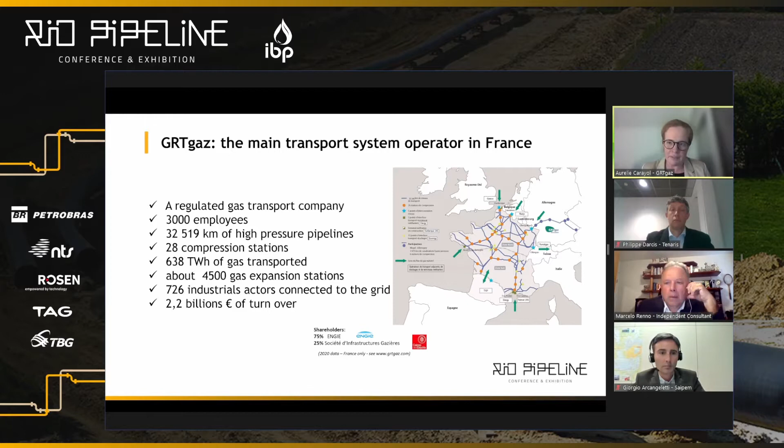My name is Aurélie Carayol, and I'm working at GRTgaz, which is one of the major gas transmission operators in Europe, with more than 30,000 kilometers of high pressure pipelines. And we transport each year more than 600 terawatt-hours of gas. And we have more than 700 industrial clients that are connected to our network. We are a regulated company, and we are preparing to accept hydrogen either as a blend of natural gas with hydrogen or pure hydrogen.

So we have two goals. The first one is to integrate the production of synthetic gas or hydrogen into the existing gas network. By synthetic gas, I mean gas produced by technologies that use waste, which contains a little percentage of hydrogen, like pyrogasification, hydrothermal gasification, methanation. In French law, there is a right to inject this type of gas, renewable and low carbon gases from hydrogen producers or synthetic gas producers.

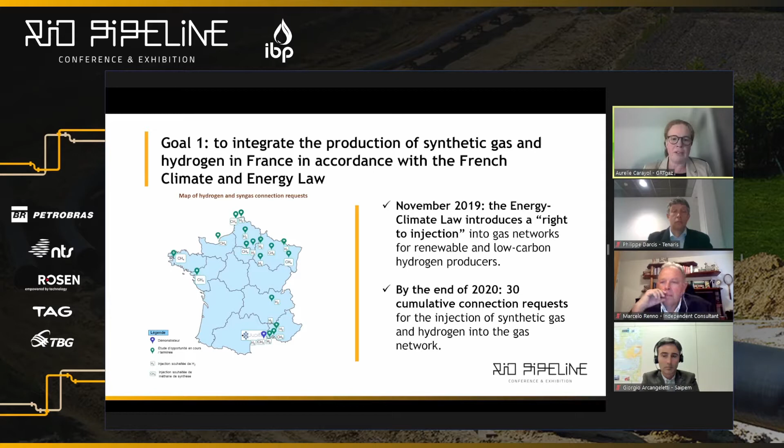And we already have had about 30 cumulative connection requests to the natural gas network, and we are studying them right now. To define all the procedures to integrate this type of gas blended in the natural gas, we have established a consultation working group led by GRTgaz, with all the French gas operators, including distribution, storage, and also associations. And we are working with the clients, because that's a huge topic, to see how sensitive the clients are to hydrogen, even for a little percentage of hydrogen. We are defining all the procedures and contracts to access the network, and a registry to have a kind of queue for these projects.

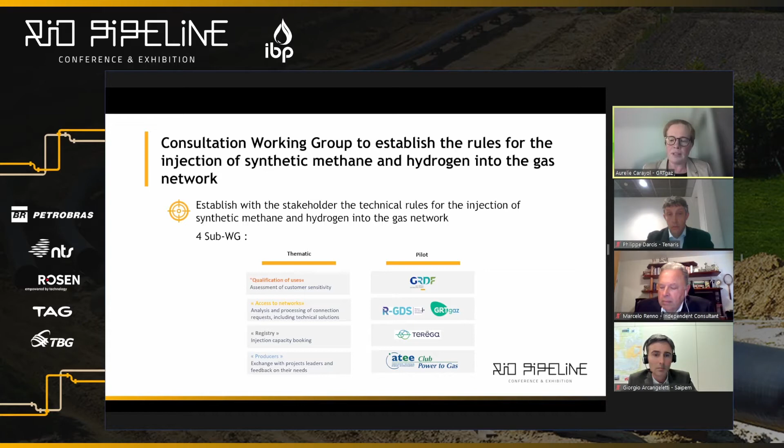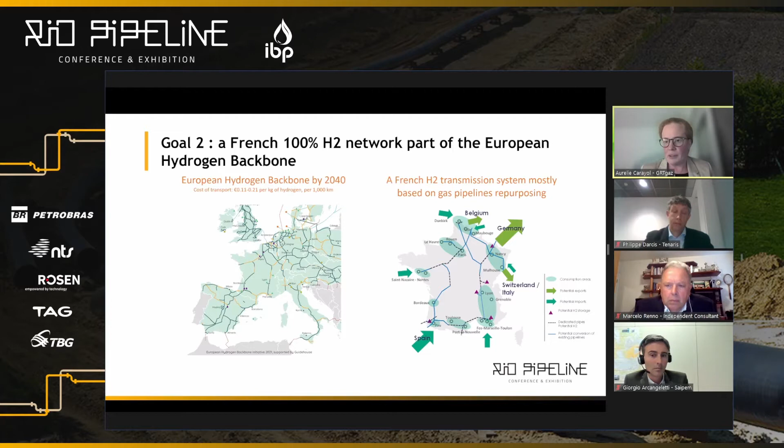Yesterday, we just released a study conducted by Guidehouse with other storage and transmission operators that showed that it's very competitive to use gas infrastructure to transport hydrogen, and that the cost will be lower than if we are not using them by 2040. How do we prepare for that?

So we are very involved in a cross-border project with Germany and Luxembourg, which is called MosaHYc, for Moselle, which is in Lorraine, eastern part of France, Saarland in Germany, hydrogen conversion. So this project is with a German distributor called Creos and a utility from Luxembourg called Encevo. And the objective is really to develop a hydrogen valley in this eastern part that we call the Grande Région.

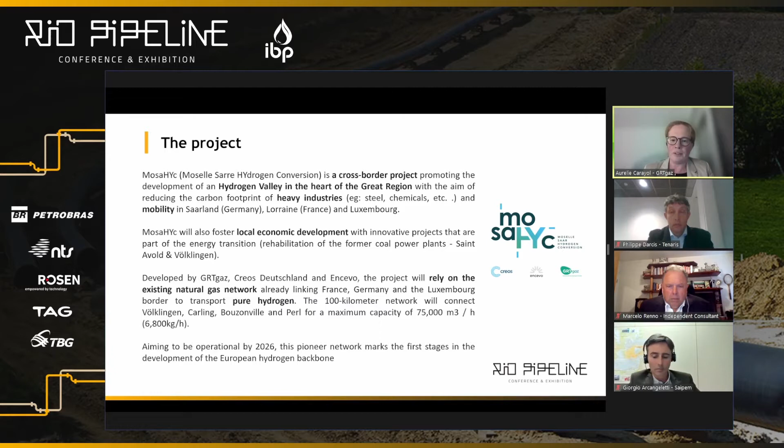It's a cross-border region. And to bring hydrogen to big industrial, for example steel industry, but also mobility in Saarland, because there is a lot of mobility in this area, people going from Germany to France up to Luxembourg. And we are going for the first time to repurpose a 100-kilometer pipeline for pure hydrogen coming from Germany up to France, up to Luxembourg. And this project will be operational in 2026.

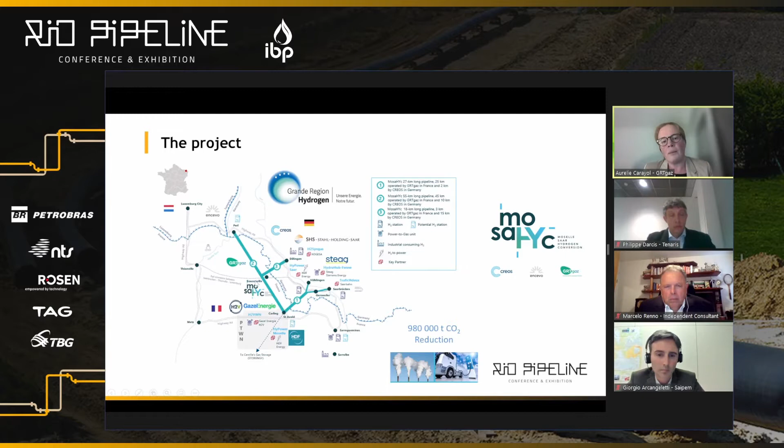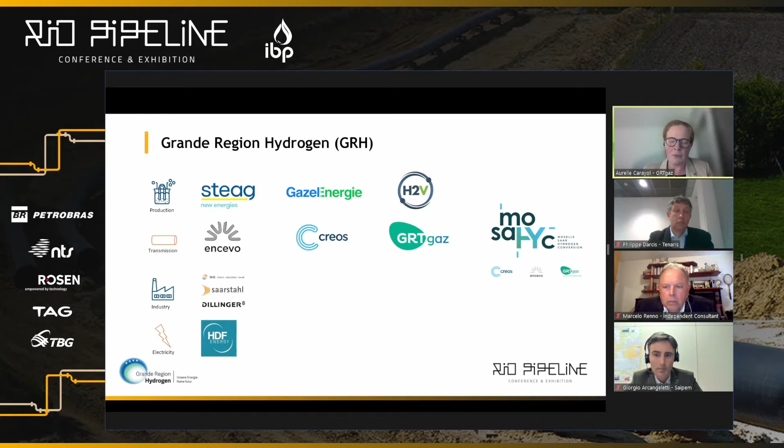And this project belongs to what we call Grande Région Hydrogène. It's a huge initiative with all the producers that I mentioned, the transmission company, and the industry that are using, Dillinger and Saarstahl, but also gas to power industry from Hydrogène de France, which is constructing fuel cells, huge packs of fuel cells, that will use this large quantity of hydrogen that will be brought by pipes. And here you see all the quantities step by step.

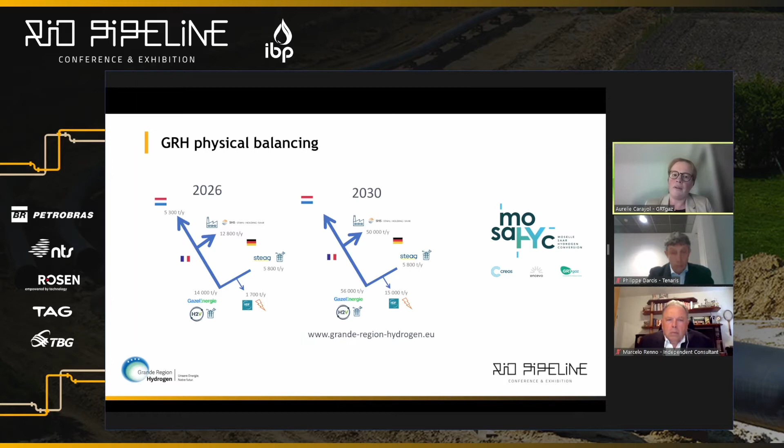By 2026, you have a production from 14,000 tons per year in France up to 5,800 tons per year in Germany, coming to the industrial clients. And in 2030, these industrial clients will consume 50,000 tons per year, because its process to produce iron will use more hydrogen step by step for direct iron reduction, like I mentioned.

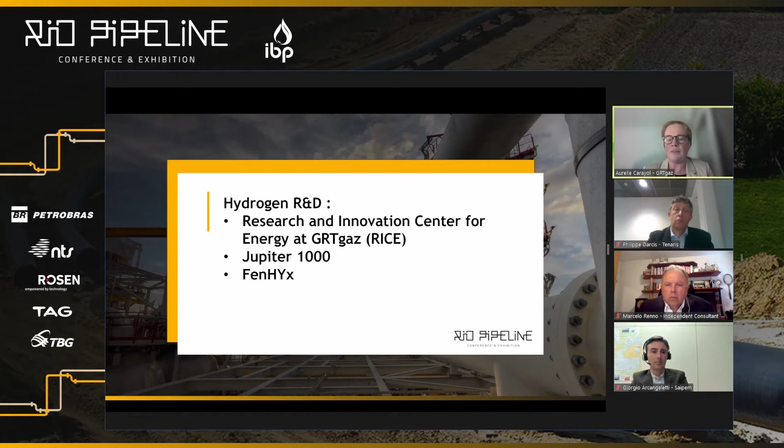We also are working to prepare our network through a lot of research and innovation projects. We have, which is very rare in Europe, our own research center, which is called RICE, with more than 100 PhDs. And we have demonstrators, Jupiter 1000, and brand new hydrogen test benches called FenHYx, which will be inaugurated November 23rd, so the week after next.

So how do we prepare? We have a dedicated research program to first ensure the security and integrity of our assets. So we are going to check our network equipment.

We will check our pipelines to be repurposed or to accept hydrogen as blending. We check all the integrity, mechanical integrity. We have a traction machine. We are also involved in safety procedures. We develop a training

with our research department because hydrogen is very specific, to know how to manage with the flame that we cannot see by eyes. And we also work on maintaining the quality of transmission. We are working on metering, certification metering for pure hydrogen, management of the network through compression, because it's kind of different than natural gas. It needs more energy for the compression. And we have specific test benches.

So we have the power to gas demonstrator in south of France in Fos that I will present later, where we can do real condition tests of blends of hydrogen into the gas network. So we are injecting in our network since February 2020 a limited amount of hydrogen, with 3 clients connected at the end of this network.

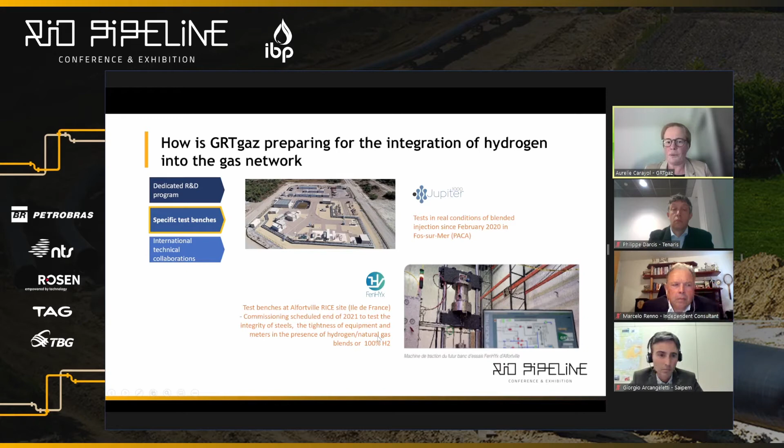And we have these brand new test benches in our research center site next to Paris in Alfortville called FenHYx, for Future Energy Hydrogen Mix. And we are going to test the tightness of equipment and also all the integrity of the steels with that traction machine that you can see in the picture.

And to mention Jupiter 1000. So Jupiter 1000 is a demonstrator with all the French players, including renewable electricity producers, Compagnie Nationale du Rhône, the electricity transmission operator RTE. We are testing 2 types of electrolysis from McPhy, one alkaline, another one PEM, with the membrane. We are injecting hydrogen into the gas network. We are working also with Teréga, which is the other transmission operator in southwest of France, but that's in the GRTgaz network. And the other part of Jupiter 1000 is methanation.

So we are combining CO2 that is captured by Leroux et Lotz from industrial fumes. And we are combining it with H2 through reactors developed by the company called Khimod with CEA, which is a huge research center in France. And we are producing synthetic methane to inject into the gas network.

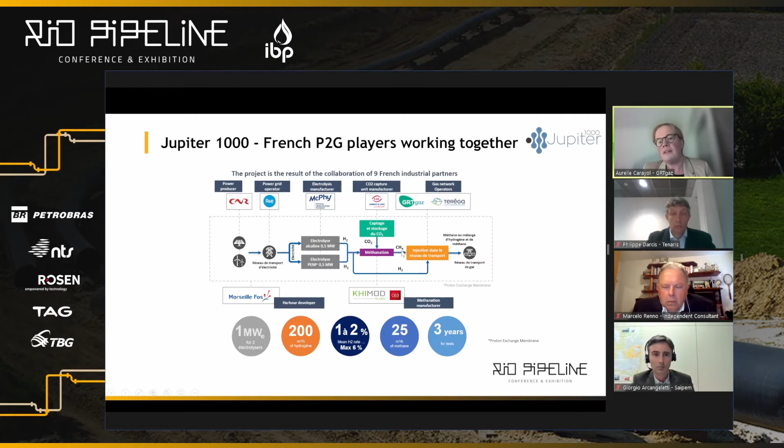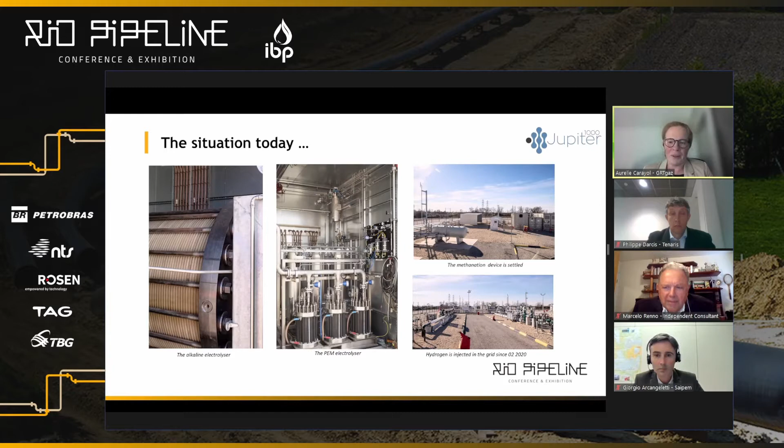And here you can see some pictures. So you have on the left the alkaline electrolyzer, the PEM electrolyzer in the middle, and the methanation device that is settled but not operational yet. In injection here you have where the blending is done. It's a little bit small, but you're invited to visit Jupiter 1000. It's open. Also, we received a lot of people to visit Jupiter 1000. And yeah, early 2022, the CO2 pipeline would be ready and we will do the methane injection.

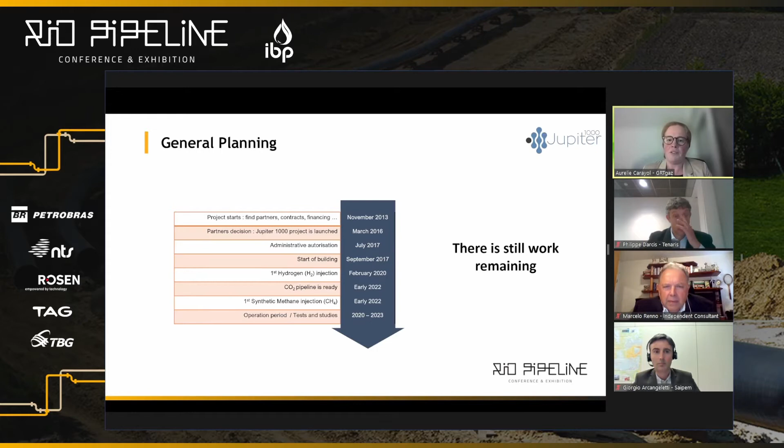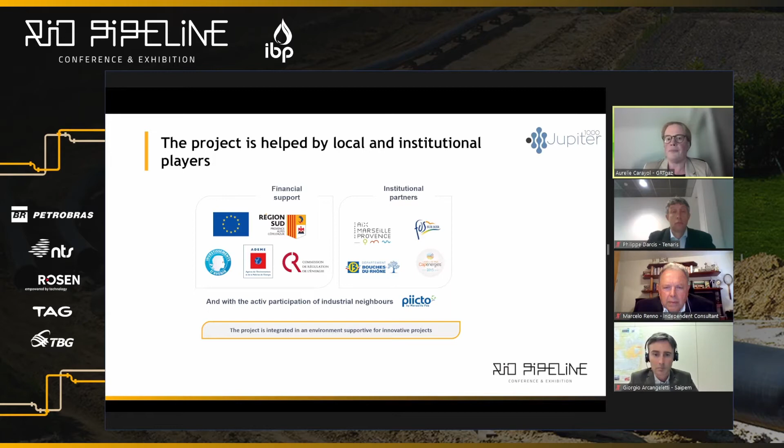This project is helped by the European Commission, the South region, our regulators, and also all the people from the area, the city of Aix-Marseille-Provence, as you can see.

Then I will focus on our R&D platform called FenHYx. As I said, we have 2 sites at RICE, our research center. This is a collaborative testing facility. That means that we have contracts with other European TSOs that will test their pipes and specific steel. We already have running contracts, and it's also open to other companies to test equipment. It's really a European but also international platform, and we would like to be as open as possible. So please feel free to come back to us if you're interested.

We are focusing also on gas quality because we changed in GRTgaz our chromatographs to be able to detect hydrogen as a blend into the gas network. Our research center has a strong experience in industrial safety, and also network materials to test permeation and things like that. And our new benches are really focused on tightness tests and pipe integrity, aging of steel tubes, corrosion tests, and treatments. And we are also able to qualify meters through aging issues and their performance.

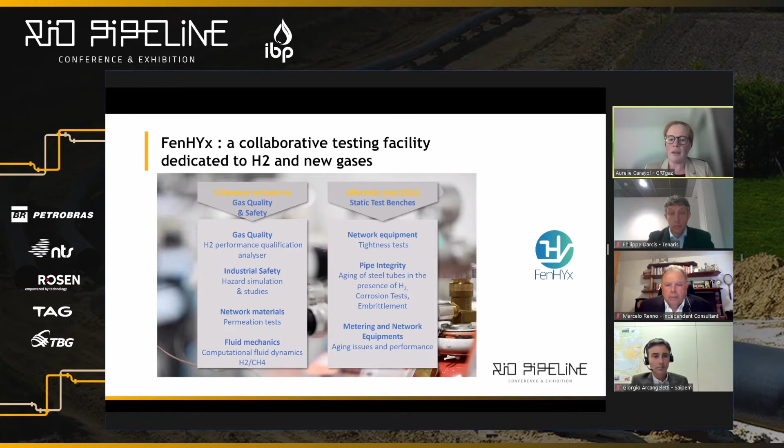So here you can see little pictures of our traction machine and the first tests that have been run. This project is also supported by Région Île-de-France. It is funded also by the Region and our regulator. And as you can see, that's all what we are going to investigate, the capability for our pipes to be repurposed and our equipment to accept hydrogen, and test also new equipment.

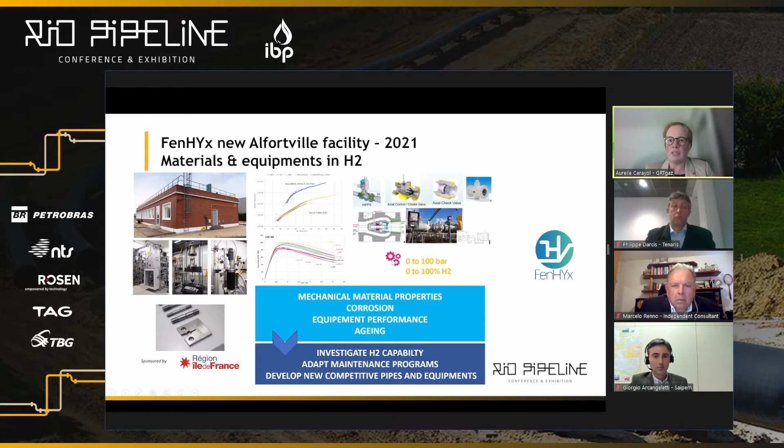These are the international technical collaborations that we have. We are part of Hydrogen Europe. We are answering calls from the ex-FCH JU, which is now Clean Hydrogen for Europe.

Our person responsible for hydrogen research is leading the strategy topic for hydrogen in GERG, which is a European research group. We are present also at Marcogaz, which is a pre-standardization group. I'm co-chairing the Hydrogen Task Force. We are part of different initiatives with other TSOs, including H2GA, led by SNAM. And we also are very involved in PRCI, especially in the renewable roadmap through our research center with our specialists and experts.

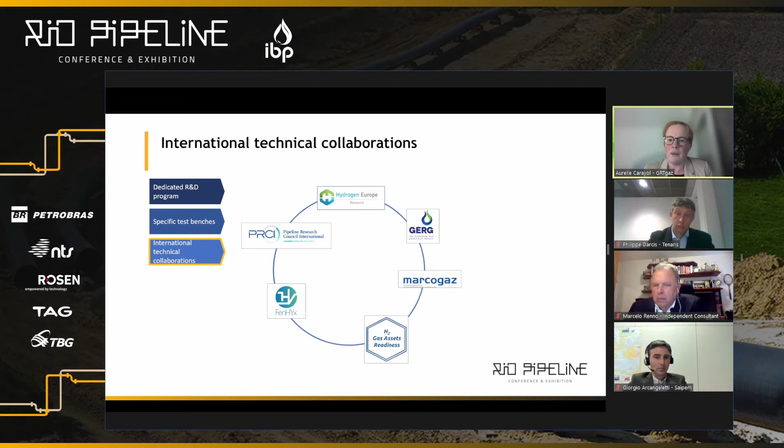Regarding RICE partnerships, here you can see that we have more than 100 PhDs, research engineers and lab technicians. We have 3 R&D centers. They have 400 patents and inventions, and they are leading expertise in process and gas characterization, pipe and grid equipment, performance and industrial safety, system modelization, and technical economical studies.

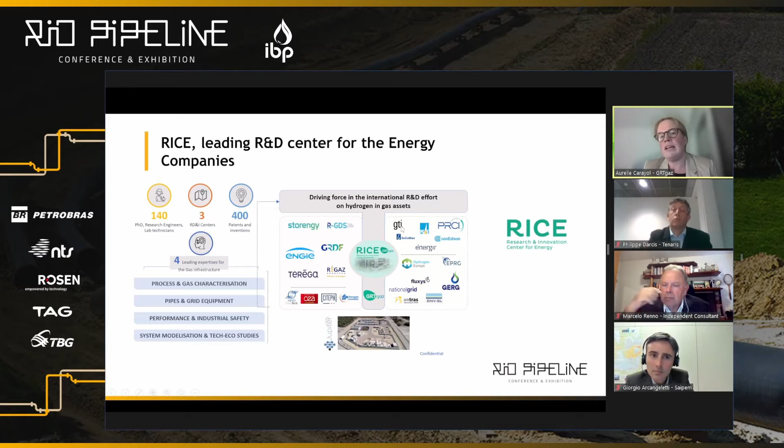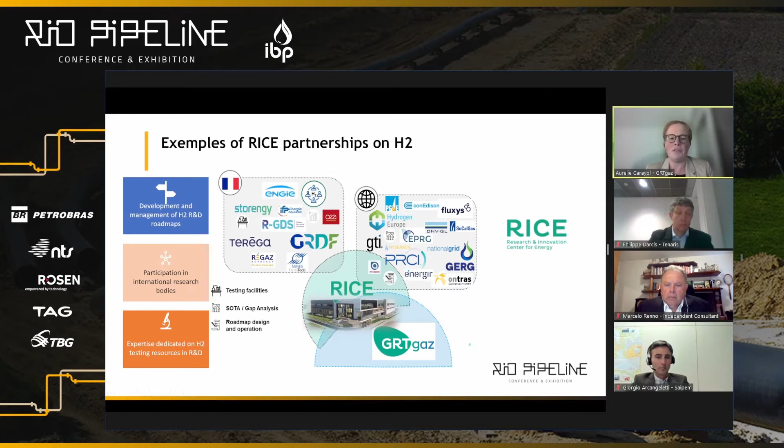And here you see all their clients and the collaboration that they have with European companies, but also American companies like Énergir in Quebec, Con Edison, SoCalGas in the US, but also institutes like GTI and of course PRCI. And this is the example of all the partnerships that they can do. They can develop R&D roadmaps. They already have answered calls to do that. They participate in international research bodies, and, like I mentioned, they have expertise and test benches dedicated to hydrogen.

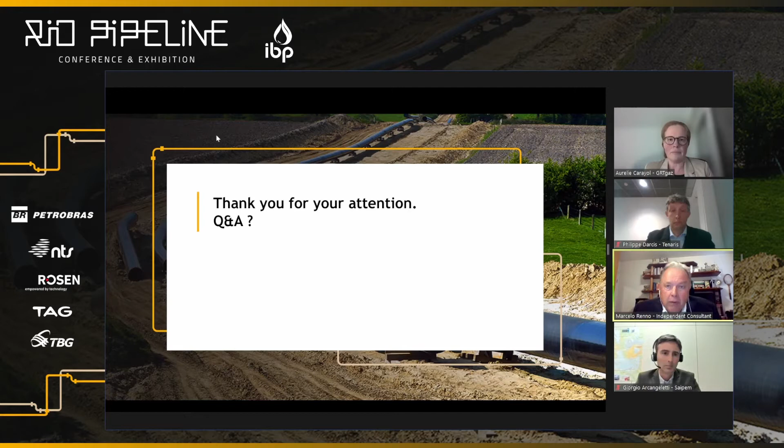Thank you very much, Aurélie. Very interesting to know about all the activities concerning this aspect, all the work being done in France, in Europe, concerning this hydrogen infrastructure implementation and also utilization of existing natural gas infrastructure. Thank you very much. And so we are going to have the Q&A at the end of the session.

So the second one that we are going to ask to present their thoughts is Mr. Philippe Darcis. Some words about Philippe. He received his PhD in mechanical engineering science from the University Blaise Pascal in Clermont-Ferrand, France. Philippe joined Tenaris as R&D department manager in Tamsa in Mexico. In 2012, he became the pipeline technology senior director in Tenaris, now in Italy. And since 2021, Philippe is the chairman of the H2Pipe DNV JIP, focused on transportation of hydrogen. Philippe contributed to more than 100 international technical papers.

So we are going to have the opportunity to listen to Philippe talk a little bit about specifications and also submarine transportation, offshore pipelines. Okay, Philippe, the floor is yours. Okay, thank you, Mr. Chairman, and thank you for the opportunity to share this presentation and experience on hydrogen transportation. I will go through this presentation that will give you an overview of what we are doing and also the global trends that we are seeing.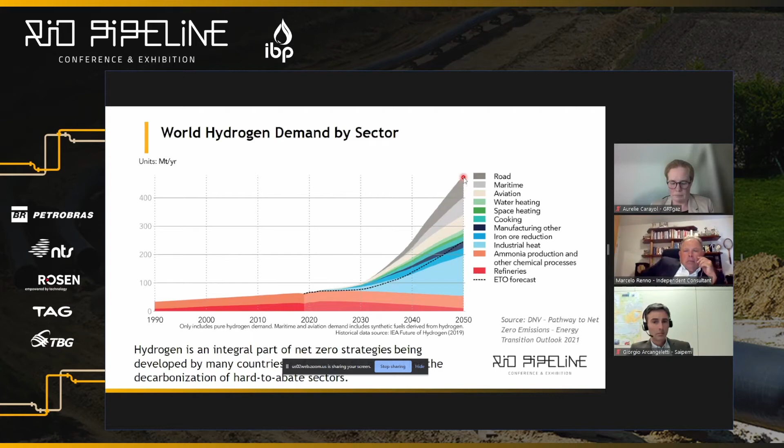And we expect for 2050 that hydrogen will take an important part of the energy for these sectors, around 15–20%. What we can see also from this graph is that hydrogen demand will almost double every decade. Now, let's have a look at how it will look. For this, I like to use this illustration from DNV, in which you can see in blue an actual network of natural gas, and in green how the hydrogen pipeline network will look.

So if you look, the blue one is well known and quite classical. You see that we start from the extraction of natural gas. Here, for instance, you have extraction from an offshore field. It will go through the processes, and the natural gas will be used in different applications like power generation, industrial, residential, and commercial.

Concerning the hydrogen, the first step will be to produce it. There are different ways to produce hydrogen, but the trend is to use what we call the blue hydrogen or the green hydrogen. Concerning the blue hydrogen, we will use natural gas, and through a reforming technology, we will generate hydrogen and also CO2 that we will sequestrate.

On the other hand, we can also generate green hydrogen through electrolysis from electricity generated by renewables, which could come from offshore wind farms, onshore wind energy or solar energy. For this new hydrogen generation, we will need a dedicated new high pressure hydrogen transportation system, and also a repurposing of the local grid and existing transportation, in which probably it will be blended at the beginning.

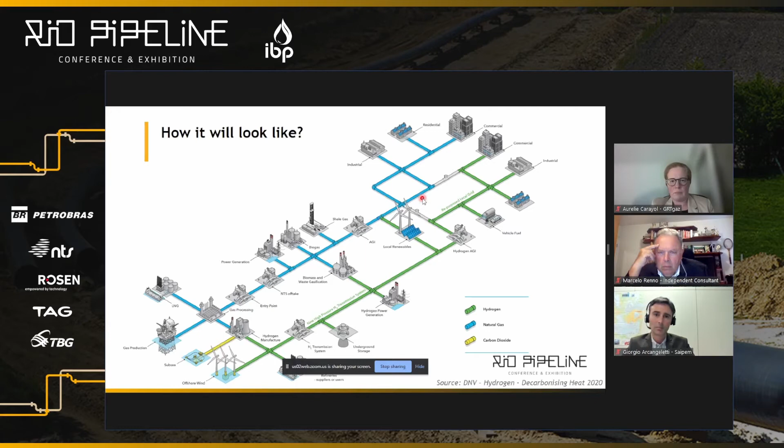Now, let's look at two different examples, one from the onshore and one from the offshore. Concerning the onshore, as already mentioned in the previous presentation, the most ambitious example that we have is the so-called European Hydrogen Backbone project, in which you can see here that different countries in Western Europe aim to transport hydrogen in existing and in new pipelines. Here you have some numbers to see how big this project will be.

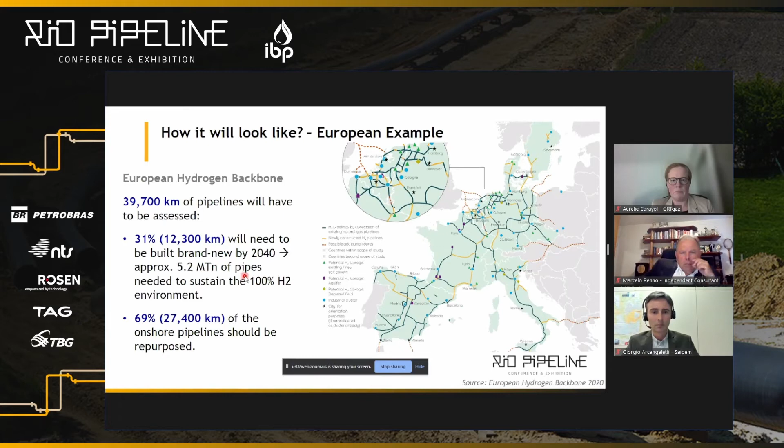So here we are talking of around 40,000 kilometers of pipeline, of which 31% will be brand new, which represents 5.2 million tons of pipe, and 69% will be repurposed. If we look now to another example, this time looking at offshore hydrogen pipeline transportation, a good example is the use of wind farms. Here you have two illustrations that represent, in the end, the same process.

We will generate electricity offshore through a wind farm. This electricity will be converted through electrolysis into hydrogen, and this hydrogen will then be stored offshore in a container directly on the seabed, and after that exported through a pipeline to the shore.

The main challenge of such a project is probably the intermittence of the electrical energy that is produced, due to the intermittence of the wind strength, and also the intermittence of the demand for hydrogen. In such a system, we will have important fluctuations in hydrogen storage and transportation that will challenge different limit states or structural integrity scenarios of the pipeline. We can name, for instance, fatigue, which will be important due to the pressurizing and depressurizing of the line.

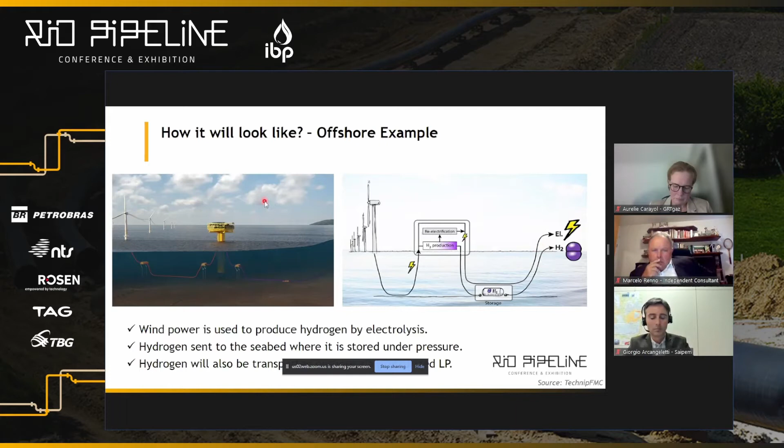Now, let's review the key elements in the development of hydrogen pipelines. Here, I listed 5 main key elements that need to be addressed. The first one is the transport capacity. The question is how much energy is moved. As you know, compared to natural gas, hydrogen has a much lower density, but at the same time a higher heating value. For a similar energy to be transported through a pipeline, we will need 3 times more volume of hydrogen than natural gas. How we will deal with this change of energy value and density in the future is a question that the industry needs to face.

The second question that we may have concerns the safety of the hydrogen itself, which is different from natural gas. Hydrogen has, for instance, a wider flammability range and also a lower ignition energy. This more explosive nature of hydrogen needs to be faced from a safety perspective. The third key element that needs to be addressed is the structural challenges related to material degradation due to the presence of hydrogen. So what needs to be modified?

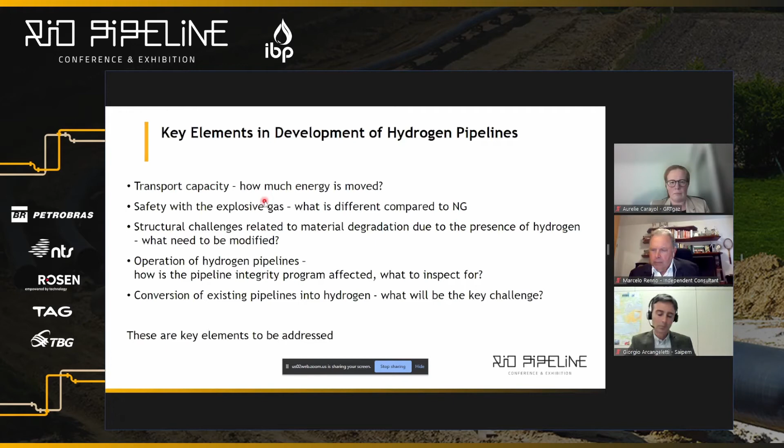Now, if we look at the different surveys performed in the industry through different professionals, we can see a good example from a survey made in January 2021, in which we asked around 600 professionals the following question: what is, in your opinion, the most significant barrier in adding hydrogen to the gas grid?

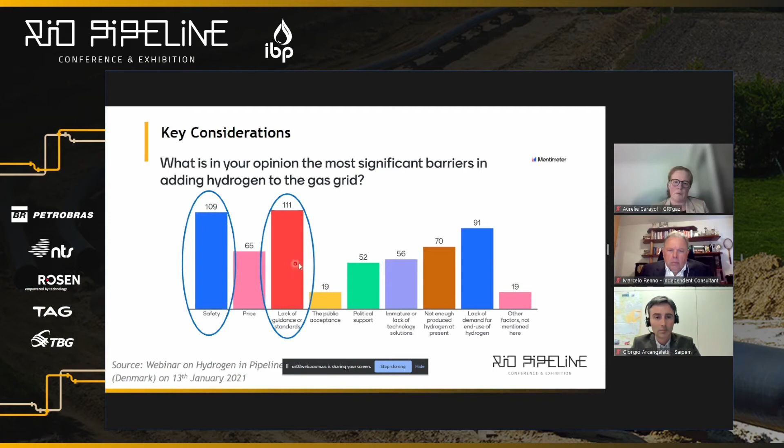So if you look at the actual way of designing hydrogen pipelines, we can easily observe that the main code of reference is ASME B31.12, entitled Hydrogen Piping and Pipeline. We can highlight three main facts concerning this code. First, it's very conservative, mainly if we use method A as the design reference, which leads to a restrictive grade in terms of pipeline and also to limited safety, very severe safety factors. The other remark is that this code is mainly based on the limit state based on burst, linking to hoop stress.

The second point is that this standard does not consider all the design limit states that onshore and offshore pipelines may face. An example is third-party damage. We can also mention soil movement or typical fatigue loads. On the other hand, this code does not provide guidelines for offshore pipelines. So based on this observation, we can see that a new hydrogen pipeline guideline is needed.

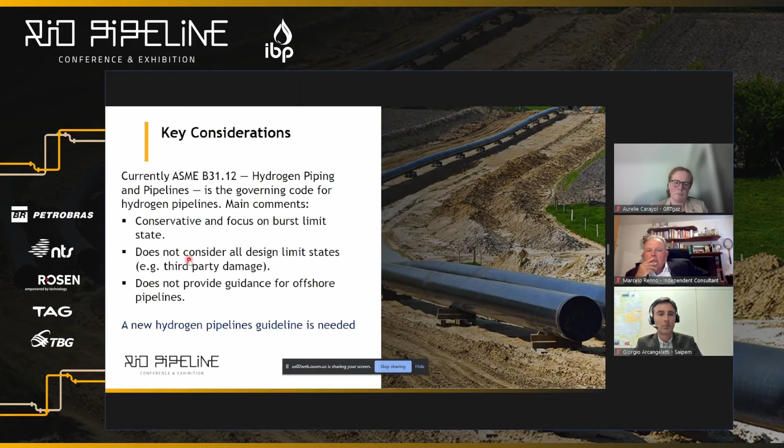Now, let's reflect on how we can build this kind of guideline or standard. I would say the basic statement is to try to identify the potential scenarios and failure modes of the pipe, and to assess them through an evaluation of, on one hand, the demand, and on the other hand, the resistance or strength.

So for this, we can evaluate different aspects. On one hand, what type of loading the pipe will have. Here we see the typical three categories: pressure, environmental, and functional/operational. From this type of loading, we can evaluate the type of failure. For instance, for pressure, we can identify burst, collapse, and running crack. We can identify how to assess it, so for instance here it's strength and fracture.

And after that, we arrive at material characterization, which is how to evaluate the pipe material.

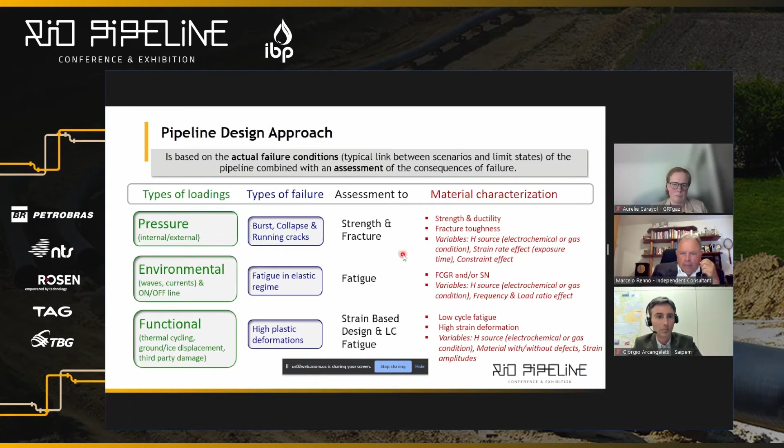So here, concerning environmental loading, in terms of type of failure, we're speaking of fatigue in the elastic regime, and for functional operational, high plastic deformation. And here we have all the material characterization that needs to be done in order to evaluate the strength of the material. The big question is how to evaluate it, and whether the experience we have in other environments is valid in a hydrogen environment as well.

Here is an example of a guideline currently in the industry; there are different ones. The one I take as an example is the DNV JIP H2 Pipe, which aims to provide guidelines based on DNV-ST-F101. So the guideline will be a supplementary recommendation based on this standard, aiming to provide guidelines for safe and reliable design, requalification, construction, and operation of pipelines intended for transport of hydrogen. Today there are 28 participants, and here there is a scope of work.

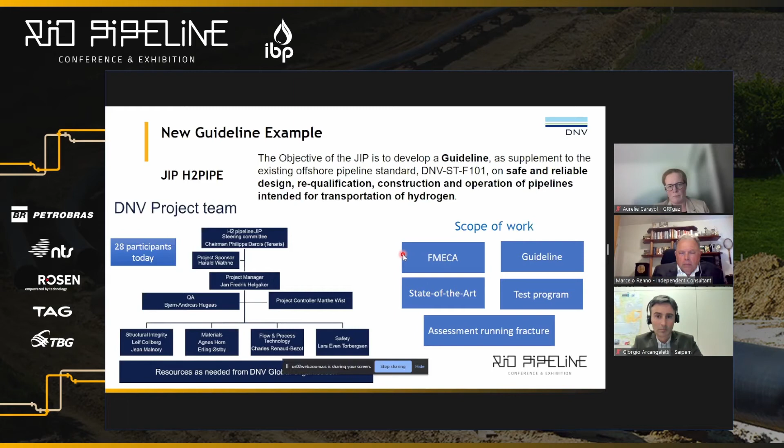I will just end with this conclusion. I think that hydrogen transportation through pipeline is a key element in the energy transition. Hydrogen will affect important things that need to be addressed, like how the pipeline is operated, the safety picture, risk assessment, and the design of new and requalification of existing pipelines. For this, a new hydrogen pipeline guideline is needed. And I will end here. Thank you.

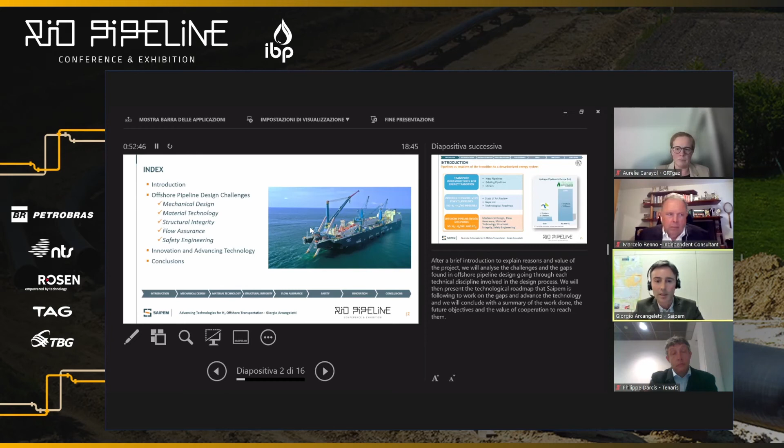In this presentation I will explain and list to the audience all the design challenges and opportunities we see for our future pipeline systems. We will start from a brief introduction, then go discipline by discipline to see the gaps we identified during the activity and the way we achieved the first results. As you have seen from the introductory slide, there are many co-authors on this work. All the disciplines normally involved in pipeline design here in Saipem have also been involved in this task - mechanical design, material technology, structural integrity, flow assurance, and safety engineering are part of the team working on this subject. We will go through a brief explanation of how we redefined our technological and innovation roadmap to target innovation and advancement in technology, and then we'll move to the conclusions.

As already partially explained by the speakers today, there is a lot of predicted and envisaged increase in demand for hydrogen pipeline. For example, the International Energy Agency sees that pipelines for hydrogen transportation, both reconverted and brand new, will increase about 8 times compared to the numbers we had in 2016, and this is a great target to take. So we launched this activity to cover both new pipeline and existing pipeline engineering.

We started from a phased approach. We completed the first part of the job, the state of the art. Then we identified and listed the technological gaps, and we redefined the technological roadmap and implemented it - we are in that phase now. All the disciplines are involved, as we said, so there's no need to repeat all of them, but basically the fluids we are targeting are obviously hydrogen, pure hydrogen, or a blend of hydrogen with natural gas.

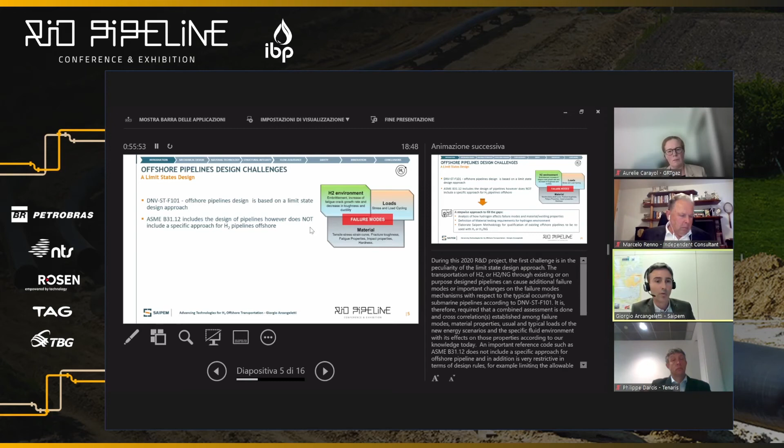Covered by Philippe. We are part of the same team in the JIP he mentioned, so we are very aligned on that.

A good way to approach this problem is through a design based on limit states, and this is aligned with what DNV ST F101 already does. So we started from that, because failure modes, generally speaking, may be affected by the presence of hydrogen, and these should be taken into consideration. We need to find the correlation between the limit states, the failure mode, the peak loads that the pipeline sees

during the installation and operating life, and so on, and the material subject to hydrogen effects. On the other hand, we have another standard available, ASME B31.12, that appears to be a bit constraining when it comes to hydrogen, for example. We will see a practical example in the next slide. So we cannot rely only on this standard, which is more applicable for onshore transportation than offshore.

Given this, we adopted a stepwise approach to fill that gap. So we started from the analysis of how hydrogen affects failure modes and material welding properties. We defined a testing matrix, a material testing requirement for hydrogen environments.

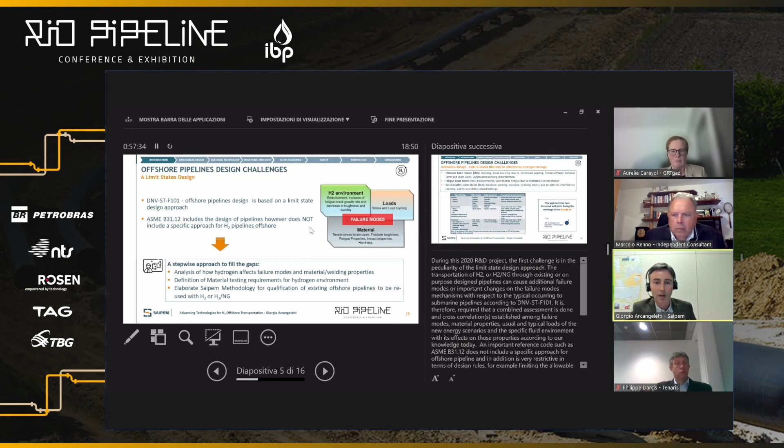This was already discussed by Philippe. Basically, we grouped the failure modes by limit states, and you see that we considered all the failure modes, starting from bursting, going to fatigue. We tried to associate a type of loading to each failure mode and to assess the design activities needed to correlate this failure mode with the materials and the hydrogen environments.

At the end of the story, the exercise gave us as a return the proposed tests in H2 environment. So we have a list of tests that we will perform. We are already starting to perform them on pipes, and this will give us very valuable information about how hydrogen affects the material at different conditions, percentages, and partial pressures. This is the same approach that was discussed with DNV within the H2 Pipe JIP.

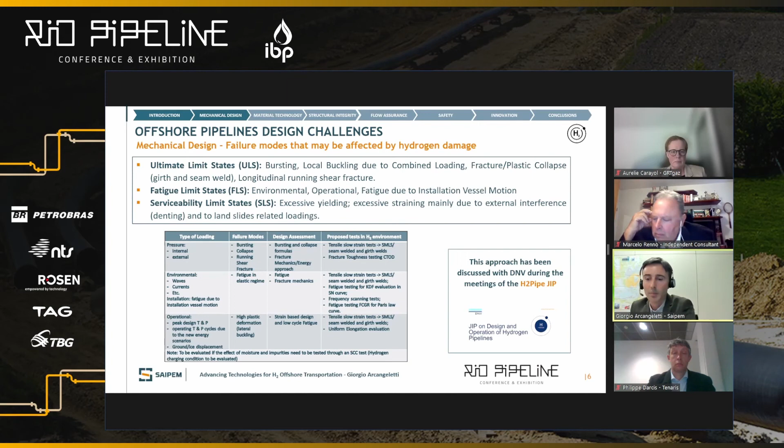As mentioned before, let's take a very practical example. We have an existing pipeline with natural gas. We want to repurpose this pipeline for hydrogen, and we apply ASME B31.12, section A.

When it comes to offshore, for sure, it's not easy to deal with something like this. It will have an impact on wall thicknesses, and so on the weight of the pipe, and on the installation feasibility and the associated cost of the system. So definitely, we cannot only rely on this very poor exercise.

When it comes to requalification, we should also take into consideration integrity assessment of the actual status of the pipe, and then we need to make a prognostic assessment of the future integrity. At the same time, if the pipeline has to be reused with hydrogen or a blend of hydrogen and natural gas, we need also to evaluate the fragile fracture and fatigue limit states.

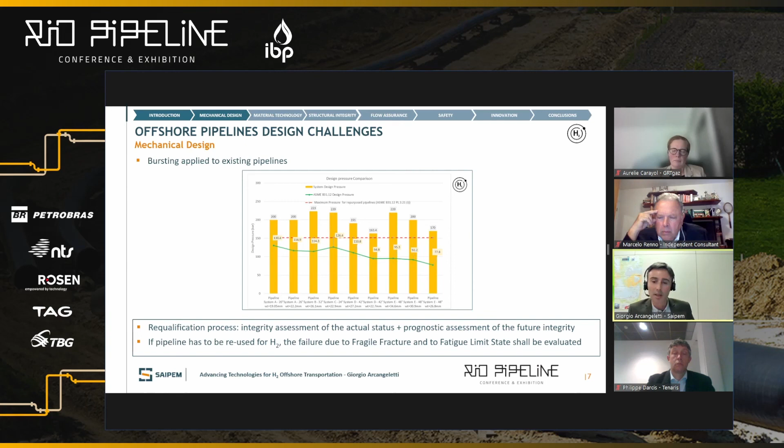In terms of materials, we have different areas that are impacted by hydrogen. Hydrogen basically impacts all the key material properties, starting from ductility, toughness, fatigue performance, in particular on the circumferential welds, which are the welds that we normally perform on the firing line of our vessels. So it's not easy; H2 diffuses through virgin surfaces.

We may need to improve the internal surface condition and reduce as much as possible the stress concentration factors. But this should be considered, not a limit to the feasibility of a system. We need to find a break-even, or at least a compromise, between this and what a normal standard manufacturing process can give you. Then, evaluation of root open defects and use of welding technology is a key factor also

for the evaluation of repurposing an existing pipeline, because when it comes to repurposing, you need to identify also the allowable defects that are compatible with hydrogen, and move forward like this to avoid any issue in the future.

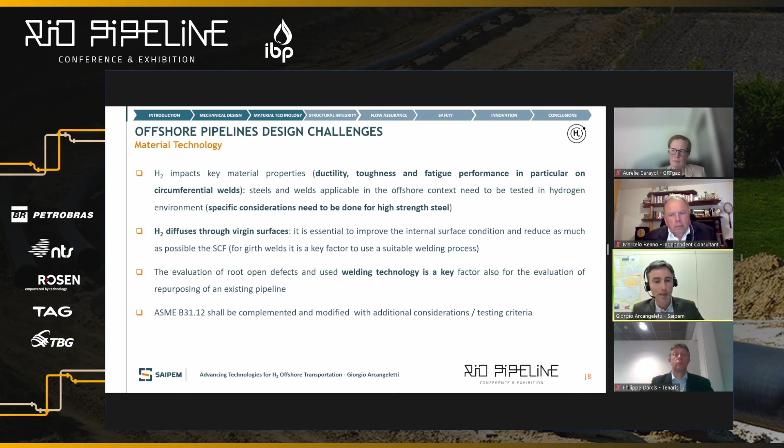So definitely ASME B31.12 should be complemented and modified with additional consideration of testing criteria, or at least we need a complement to DNV ST-F101 to make offshore pipelines definitely easier to make for hydrogen.

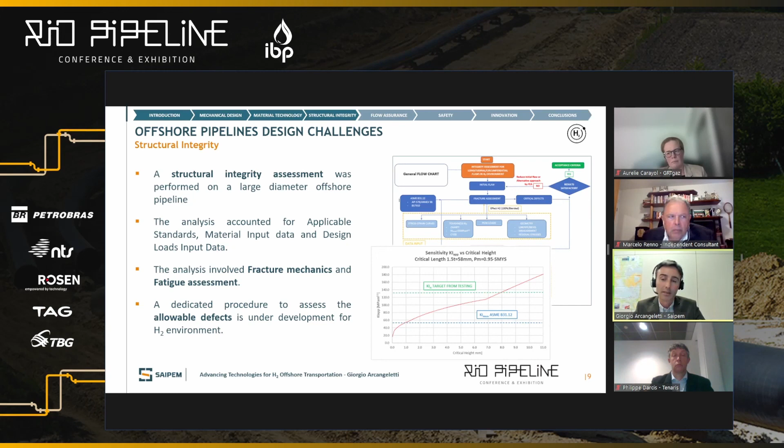So structural integrity is obviously one of the key points of the R&D activities. Here you can see that we basically set up an assessment on a large diameter pipeline, and this analysis and the activity behind it allowed us to produce a dedicated procedure to assess the allowable defects for an existing pipeline that we want to reconvert for hydrogen use.

Flow assurance, we partially already covered this item. So with hydrogen, and with hydrogen mixed with natural gas, we have a different phase envelope, not easy, not symmetric. So we need to face it. And also hydrogen, for its properties, has a different energy carrying capacity than natural gas, as we already mentioned.

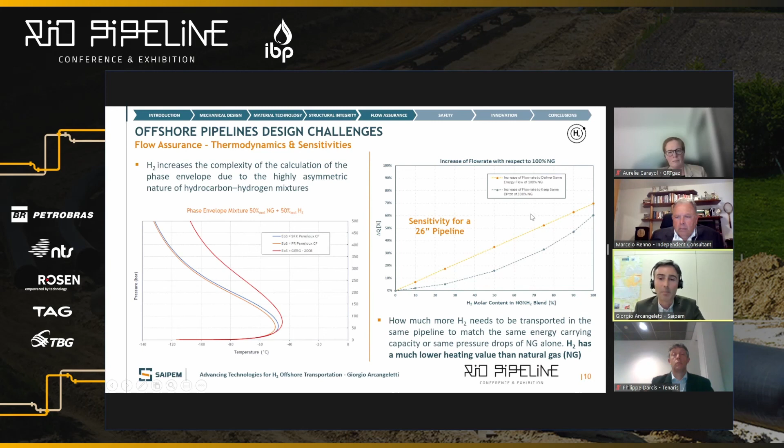So we made a sensitivity on a 26-inch pipeline, for example. You can see that if we pass from 0% of hydrogen to 100% of hydrogen, keeping constant the energy carrying capacity, we should increase the flow rate by about 70%. And if our target was to keep the pressure losses constant, we would never achieve the same energy capacity. So we are obliged to accept a lower capacity in terms of energy by the system.

Excuse me, Giorgio. Yes, please. Just 1 minute more, please. Yes, I'm closing with safety.

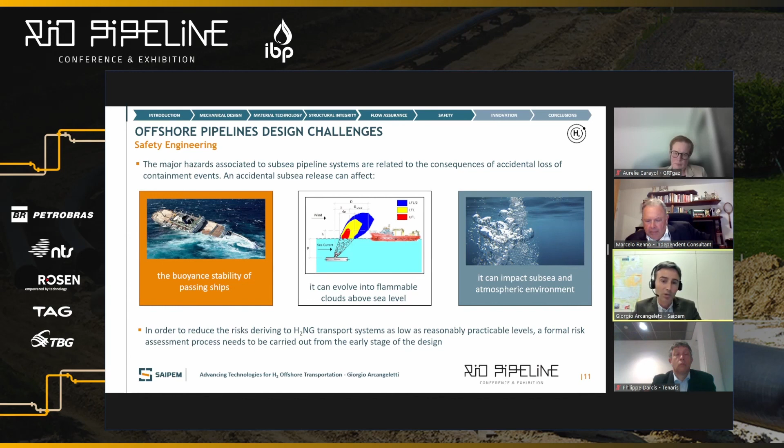Safety is a key factor here because in case of accident, there are major hazards associated with a release of hydrogen. So buoyant stability of passing ships, flammable clouds above sea level, impact on the subsea and atmospheric environment. We want to consider all these things, and we want to produce a system that is low risk. But at the same time, there are some gaps: no experience offshore, no available data, no collection of statistical databases. We need to build this, I think, all together, with the contribution of partners, operators and contractors.

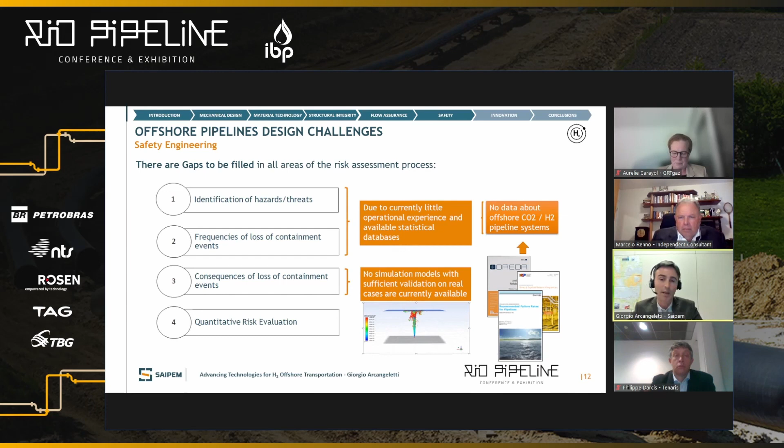So for safety, we will start from the identification of hazards and threats, the quantification of the frequency of loss of containment, and the assessment of the consequences. And then we will be able to produce a real quantitative risk evaluation. We are making good progress on this.

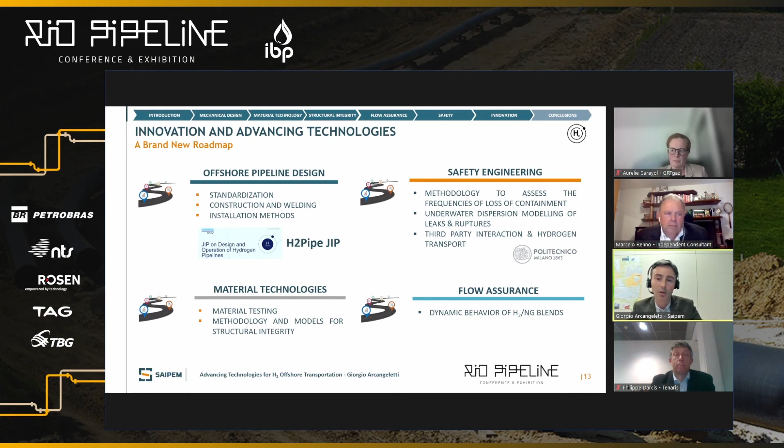So this is the roadmap of my team for the future. We will continue insisting on offshore pipeline design activity with our standardization contribution with H2Pipe JIP. We will improve our construction welding capabilities and installation methods. For material technology, we will go through real testing, full and small scale, and the methodology and models for structural integrity. On safety, we will continue the activity that I just mentioned, and for flow assurance, we will deeply analyze the dynamic behavior of hydrogen and natural gas blends.

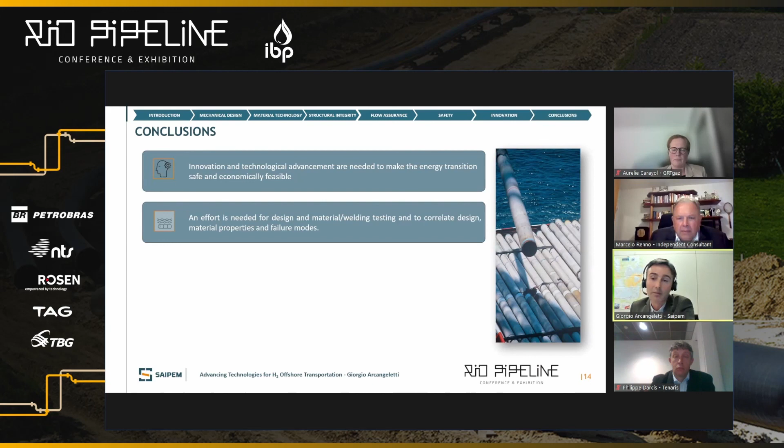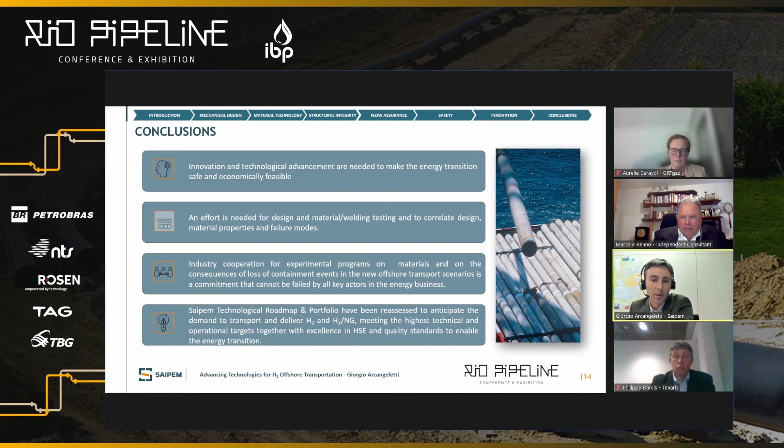So definitely we need innovation to advance on this and to make it economically feasible. We need an effort, especially on design, material, welding, testing, to correlate design and material properties and failure modes. Industry cooperation is key here. And that's how we reassessed our technological roadmap to meet that. So this was the last.

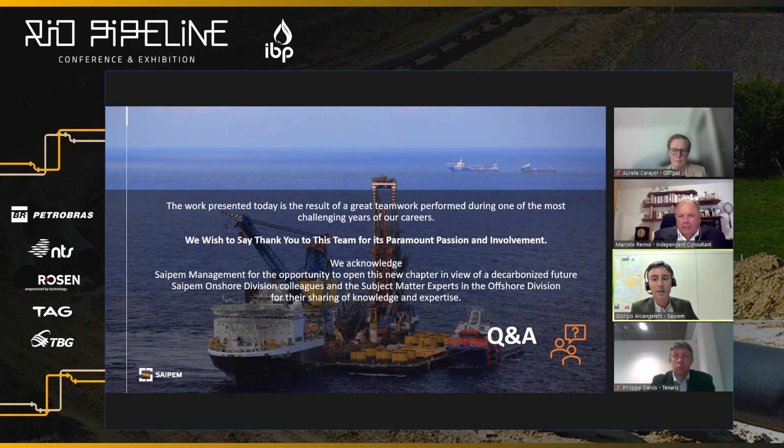A very good presentation, very exciting, showing all the aspects that need to be taken into consideration. Unfortunately, I don't have time for questions. I would like to thank you very much for all your contributions. Extremely good contributions. Philippe Darcis, very good. Giorgio, perfect. A lot of worries, a lot of work needs to be done, considering everything that you have exposed to us: questions about design, about capacity, questions of how to fund these huge investments. So I think it's an exciting time to come, and everybody needs to go home to a lot of work to be done.